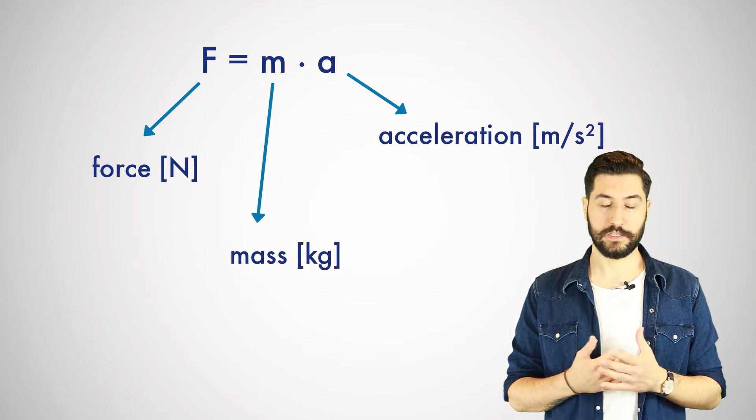What is a force? In classical physics, this is an action that can accelerate or deform a body. You cannot see the forces themselves, but you can recognize them by their effects. The well-known formula for this is force equals mass times acceleration and the unit in SI is Newton. A good guide value is, for example, a well-trained construction worker with a weight of 100 kilograms, who causes a force of 1 kilonewton due to the acceleration of gravity.

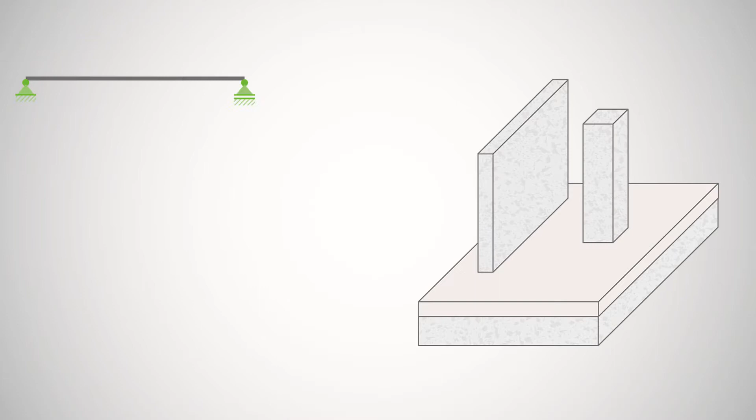We engineers consider forces to be somewhat simplified because our calculations are usually idealized. Forces that act permanently or only sometimes on a structure, such as the self-weight of the structure, wind, snow, or even vehicles are called loads. We can divide these into the following types, depending on the target surface. Single loads. These are forces applied at specific points by an arrow indicating the direction and the point of application, such as the load transfer of a column to a foundation.

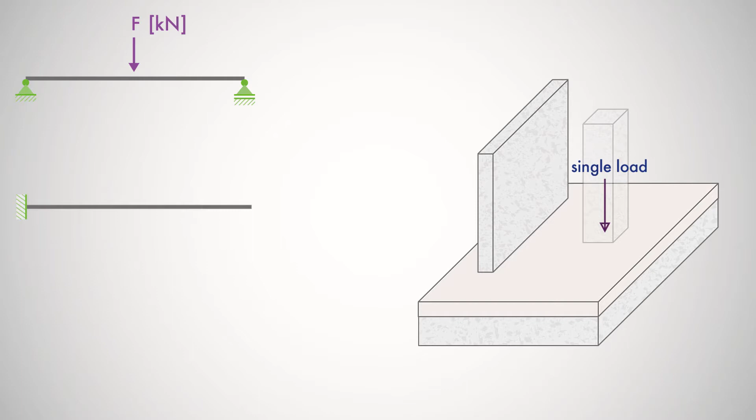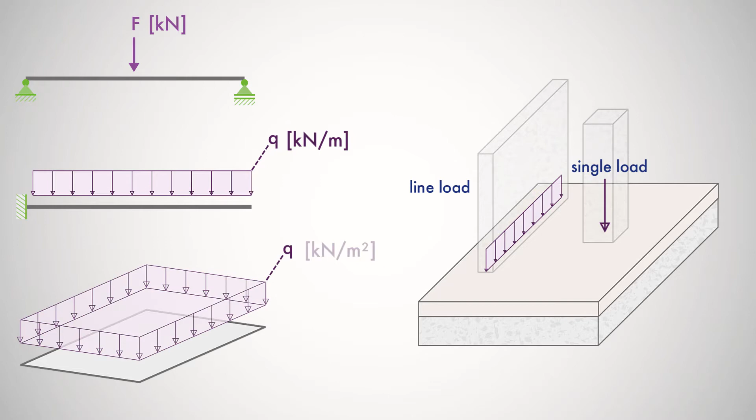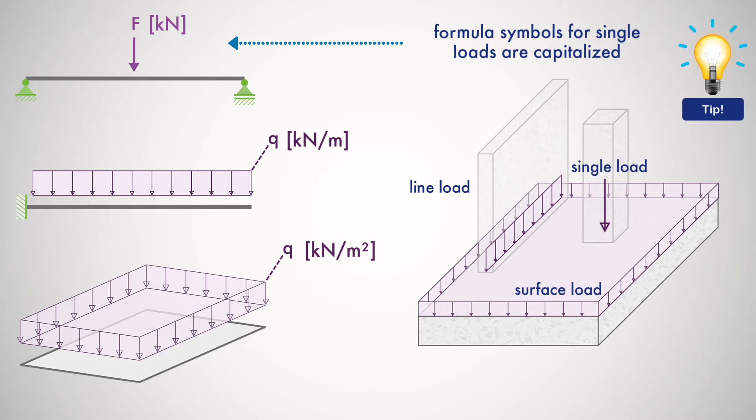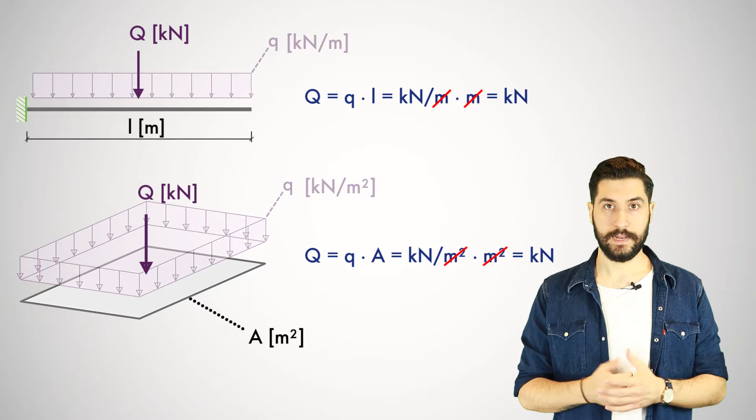Line loads. These are forces distributed over a certain length, indicated by a series of arrows, such as non-load-bearing walls. And forces distributed over a certain surface are symbolized by a surface of arrows, such as the floor structure of a floor slab. These are called surface loads. You can find the resulting concentrated load from line loads and surface loads by multiplying it by the respective length or area. However, there are not only constant line or surface loads. Trapezoidal or triangular loads are also very common in structural design. For example, by the load distribution of a floor.

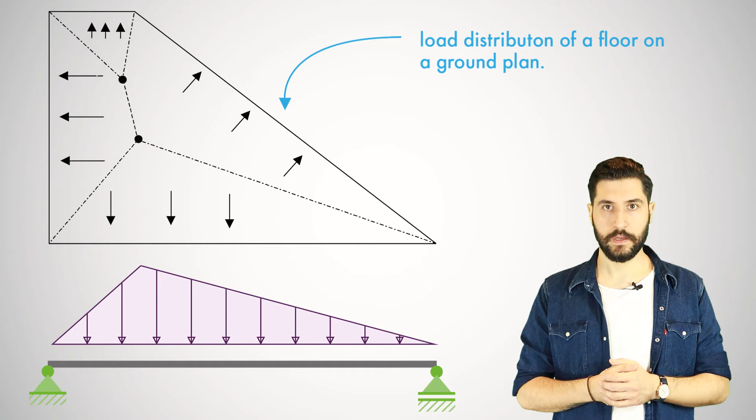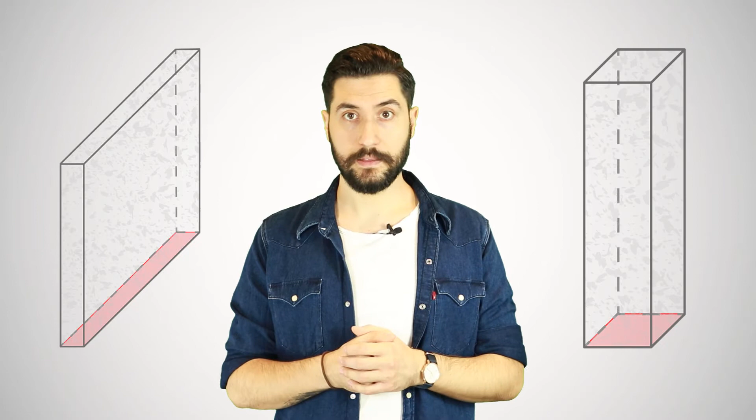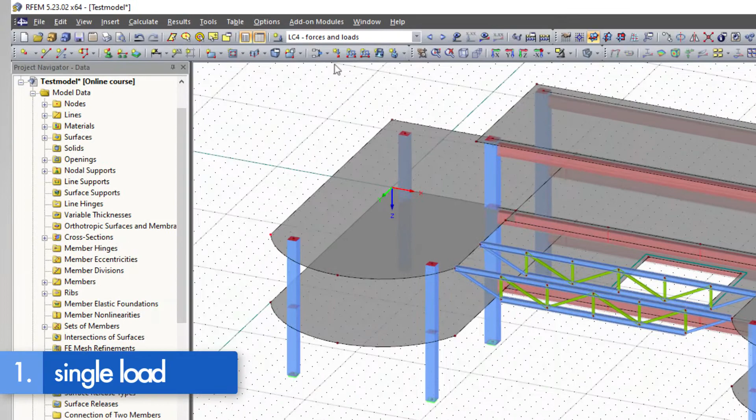Point loads and line loads do not really exist, because all structural components or bodies have an action surface, albeit a very small one. Simplifying and on the safe side, we do not consider them as surface loads, but idealize them. In the practical implementation in the structural analysis software RFEM, it looks something like this. First, we select the desired load case in which we want to enter our loads. A single load corresponds to a nodal load in RFEM, so we simply click the node where we want to apply the load. Then we select New Nodal Load and enter our load parameters.

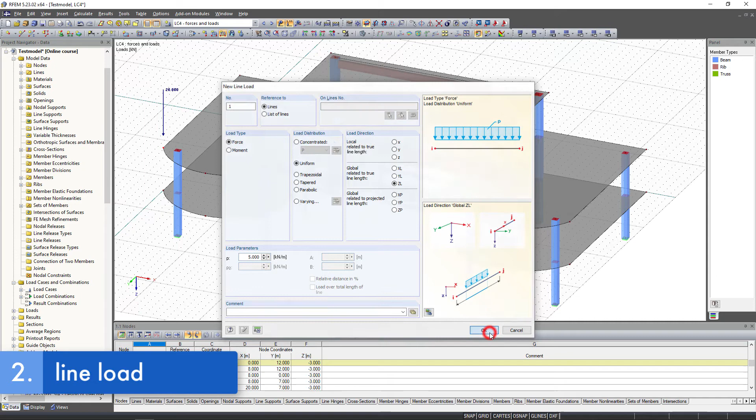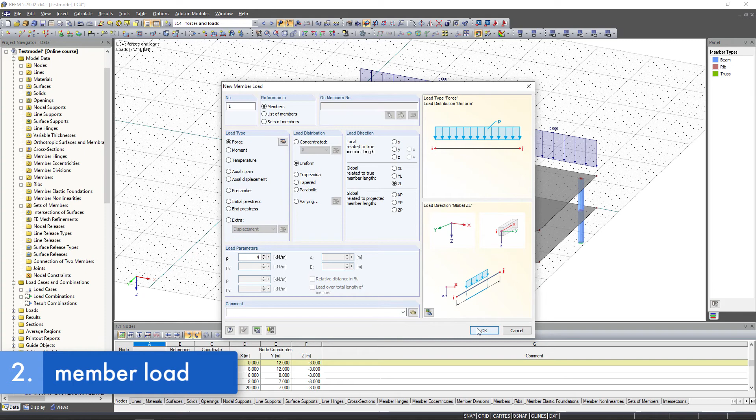To enter a line load, we have to differentiate between line loads and member loads in RFEM. If we want to apply the load to a surface that is surrounded by lines or on which lines are located, we use line loads. For beam structures, we use member loads instead of line loads. Finally, we enter a surface load. To do this, we click New Surface Load, enter our load size, and select our desired surface.